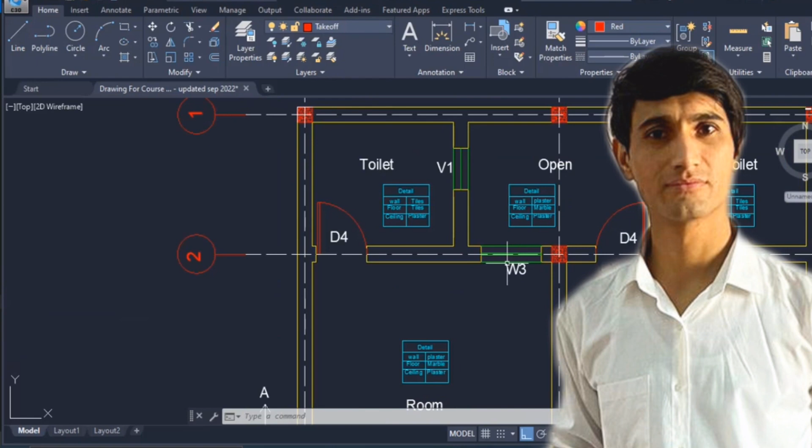Now in this tutorial we are going to find out tiles for toilet. For tiles, what is the end value? What we need actually is the total area, whether it is floor or the walls, tiles, for each toilet. And the rest we are using for floor as marble, and walls paint and plaster.

Let me simply go here. This is basically toilet 1 and this is toilet 2. Now for the floor, what we need is the total area for the tile, and for the wall we also need the total area for the tile. It is very important while finding tiles to check the internal elevation of the toilets, in order to check the total height for the tiles.

Let me simply go here. We have the internal elevation over here for the toilets, and it is clearly mentioned that our tile level is only up till the top of the doors, and this is basically the door level. Up till this position we need to find out the wall tile height. And for the floor, definitely we need to find out the total area over here.

So this is what we need to find out in toilets: first for the floor, and then for the walls as well, the wall tiles. Now let's move into Excel and find out the tile quantity over there.

Now here we have the Excel sheet and we are done up till the plaster work. It is time to find out the tiles in the toilet. To do this, I'll copy one of the tabs from here, it could be any. Let me copy this one, use move or copy, move to end, create copy, press OK. Rename this as Tiles for Toilet. Next I'll also write here, tile for toilet.

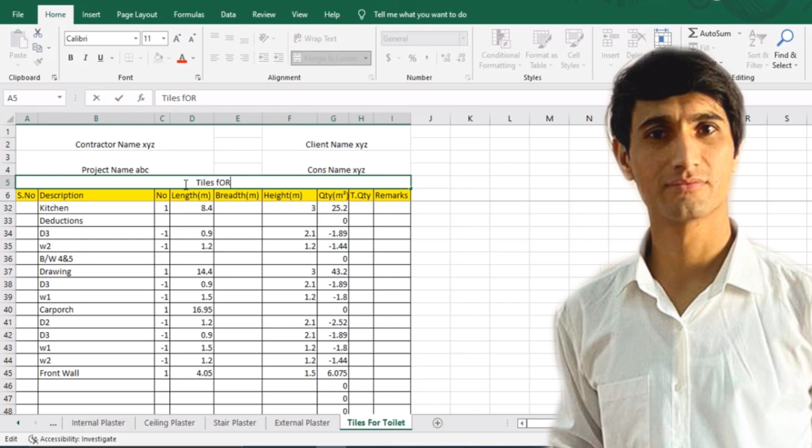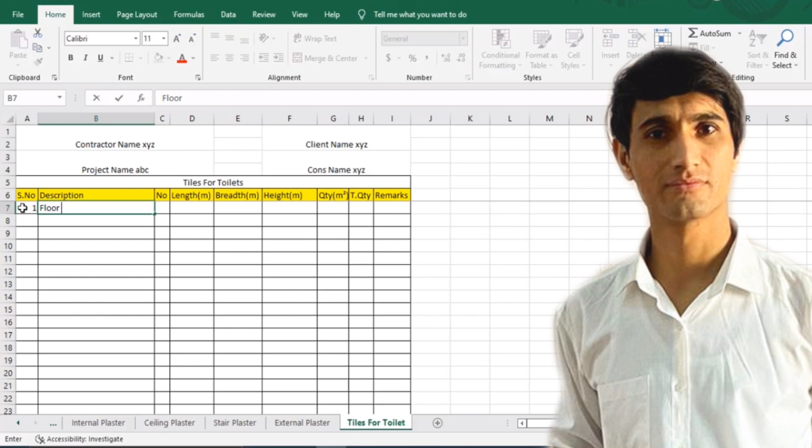Now next to it I'll simply delete all of this stuff from here. First of all I'll go with floor tiles number 1, then floor tiles. In floor tiles definitely we need the area over here, so I'll go with number 2 because we have two toilets with the same area, this toilet and this toilet as well.

Now in order to find out, I'll go with the polyline command again, and I'll hit enter. If you are working in AutoCAD, you can find out through the polyline command as we are doing it. And if you are working with a PDF file, you need to find out the length and the breadth. In the PDF section you can go and watch that particular video if you want the manual calculation.

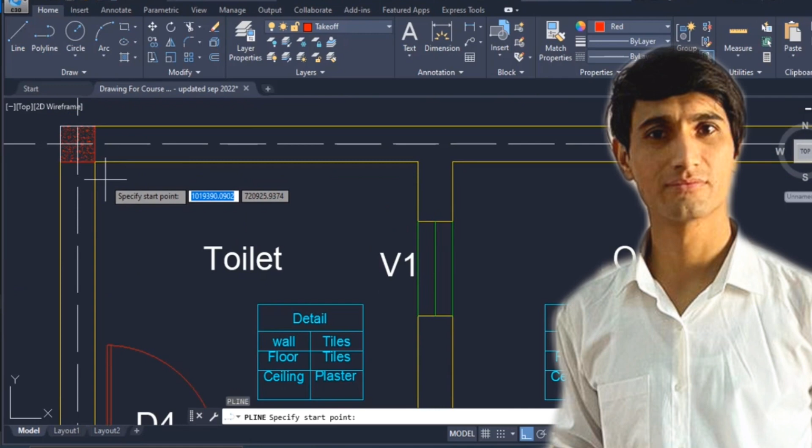So start right from this position, then we will move toward this direction, then here, and remember the tile will be up till this level. This should also be covered, the door area, and I'll close this one.

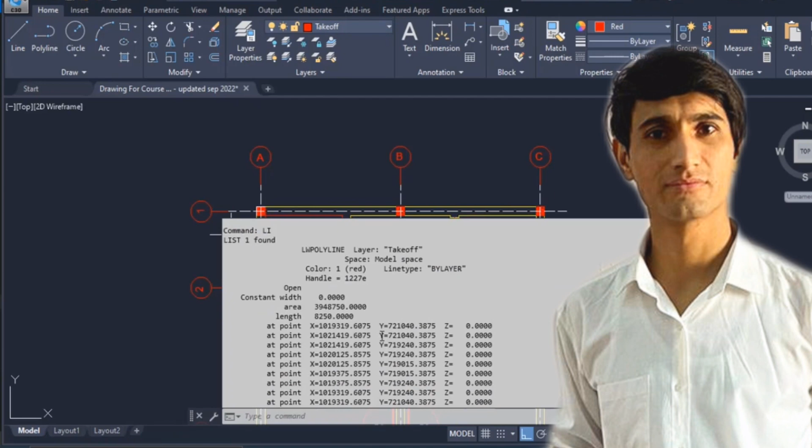Now let's find out the total area over here. With the list command we can find out the total area, and the total area over here is 3.94 meters square.

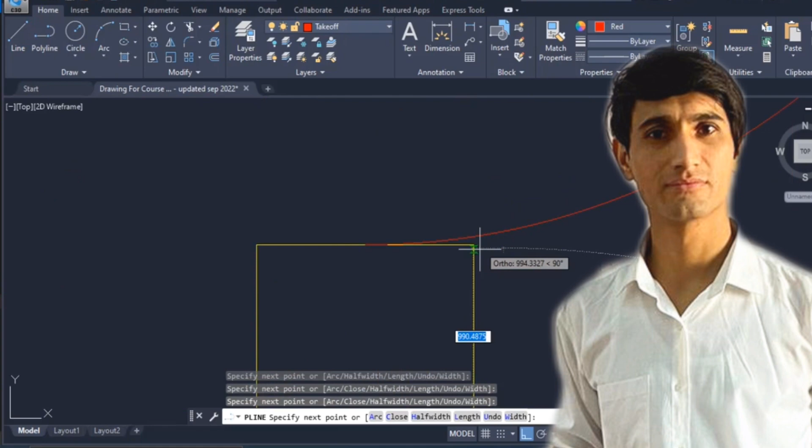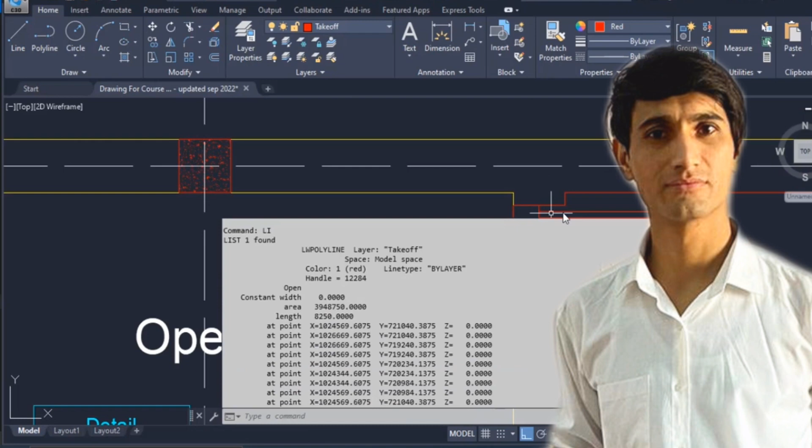Let's check this one as well, whether it is the same or not. So start right from this position, move toward this direction, and here as well, this one. Oh no, we have not taken the exact point. Then next to it we will go toward this direction, then here, and at last we will close this one. So select this, and with the list command you can find out the total area, and the total area is the same, 3.94 meters square. So that's why both of these toilets are the same.

Next, I'll go here in Excel for the external stair plaster. I'll copy this format since we need the area, move toward this direction, and put here 3.94 meters square. So area is equal to 3.94 meters square, and this is what we need over here in the tiles. We need the total area, so numbers multiply by area.

Now there is no deduction in the floor tiles. Definitely we do not have any kind of deduction over here, but when we find out the wall tiles, we have to deduct the doors. So let me delete both of these, and now we will go for the wall tiles.

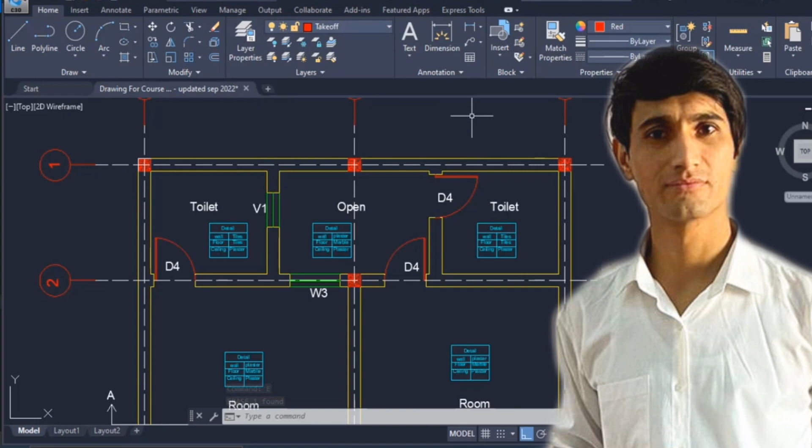Now in wall tiles, what we need is the total perimeter of the walls and the height of the tiles. Height we have checked over here, up till door level or lintel level we have the tiles, so it is a total of 2100 millimeter. You can check it over here as well. The door level is 2100 millimeter, and this is basically the lintel level.

So this is height. In order to find out the perimeter, we will go with the polyline command again. Or if you are doing manual calculation, you can go like this: length of this, then length of this, length of this, length of this, plus you need to add all of this and multiply by height.

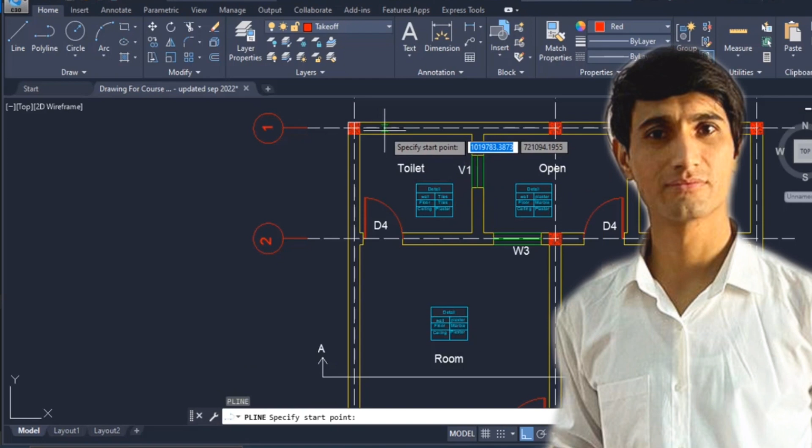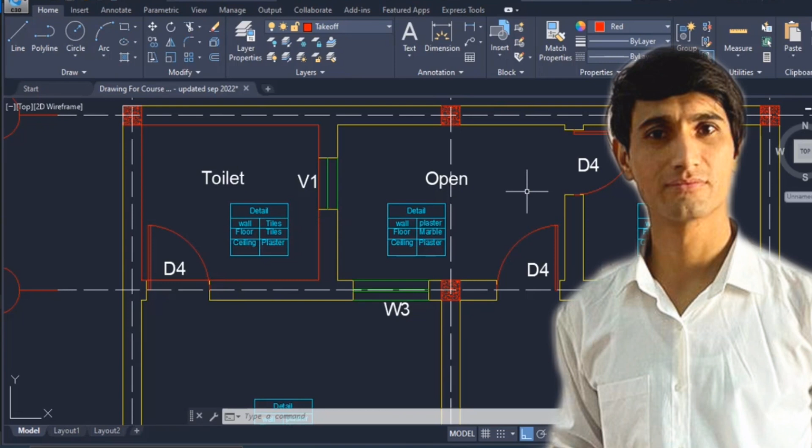So next we have wall. PL enter, and we will start right from this position. Or you can go with the rectangle command as well. Move toward this direction and then close this one. Select this one with the list command, find out the total length over here, the perimeter, not the area. Remember this one. So it is a total of 7.8 meter, and same goes for this as well, 7.8 meter, because both of these are same. You can check it as well, no problem.

So floor tiles, and now we will have the wall tiles, and we have 2. What about the length? 7.8 meter. Now what about the height? 2.1 meter, up till this level we have the tiles. And now in order to find out the total area, it is equal to numbers multiply by length, multiply by height, and hit enter. So this is basically the total parameter for the wall tiles as well.

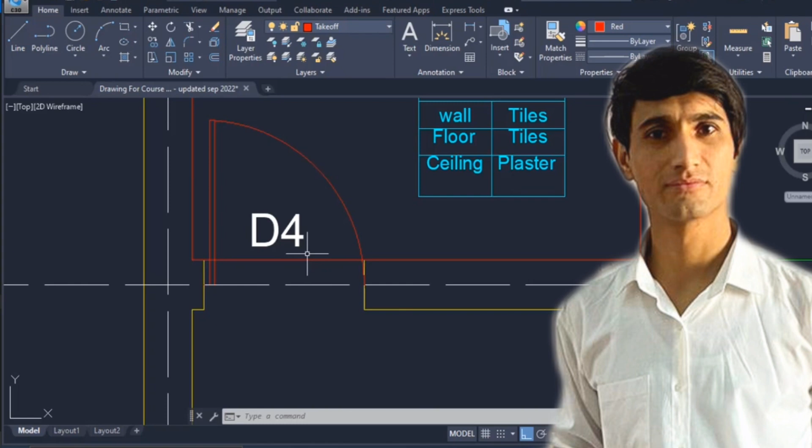But we need to do what? We need to do the deductions as well. Remember this one, we have taken this area as well, right from this position up here, and definitely we do not have tiles over here because this is the door. So we need to do the deduction over here for the doors as well.

So I'll go here and write here deductions, and this is basically D4. We have 2 deductions for D4 because we have 2 toilets with the same doors. What about the length? The deduction length, right from this position, will be equal to breadth of our door. So D4 is 0.75. And what about the height? Same as 2.1, because this is the height of our tiles. Hit enter.

Now let's move it toward this direction, I'll drag it over here, and we have the total area for the tiles is 37.49 meters square. According to bill of quantity, we need to find out the area for the tiles. And if you go into the market and want the tiles, you need to give them the area, whether it is in feet square or meter square, but they will demand the area. According to that, they will give you the tiles. So we have found out the total number of tiles here in the toilets, and this is how we can find out the.